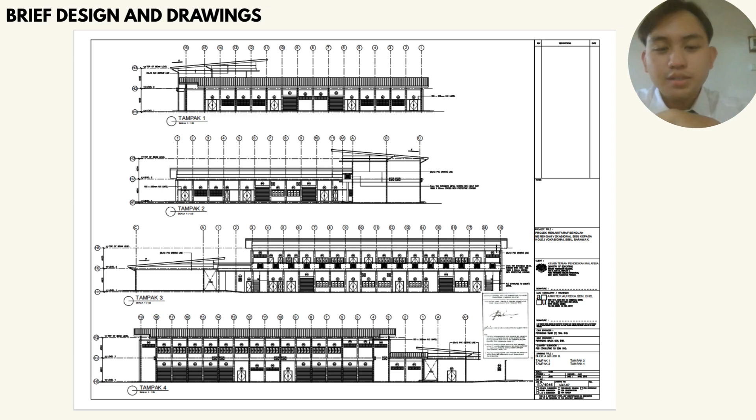Hello everyone, especially to our beloved lecturer Sir Faiz. This is the floor plan for our drawing, which is just a brief design and drawings for the project for College Vocational in Sibu, Sarawak. Thank you.

Hello everyone, ladies and gentlemen, especially Sir Faiz. Now we move on to details of the contract. The Malaysian Ministry of Education proudly announced tender number KP (BP-T) TEN. 14-2020 for the transformation of Sibu Vocational Secondary School into Sibu Vocational College in Sarawak. This landmark project includes major upgrades to Block A, B, and C, extensive external work, and specialized M&E services.

We invited qualified, visionary contractors to seize this opportunity to shape the future of vocational education. Together, let's build a world-class learning environment that empowers generations to come. Thank you.

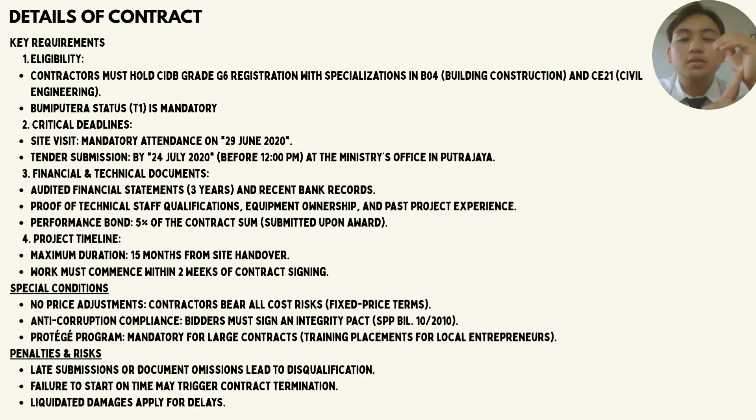The Malaysian Ministry of Education invites CIDB G6 registered Bumiputera (T1) firms with B04 and CE21 specializations to bid for transforming Sibu Vocational Secondary School into a premier vocational college. Tender number KP (BP-T) TEN. 14-2020. The critical dates: mandatory site visit on 29 June 2020, submit bids by 24 July 2020 at 12 p.m. sharp.

Required: 3 years audited financials, technical proofs, and a 5% performance bond. The project must complete in 15 months with strict anti-corruption compliance (integrity pact SPP 10-2010) and protege program participation. Delay risks termination and penalty. This is the chance to build Sarawak's educational future. Thank you.

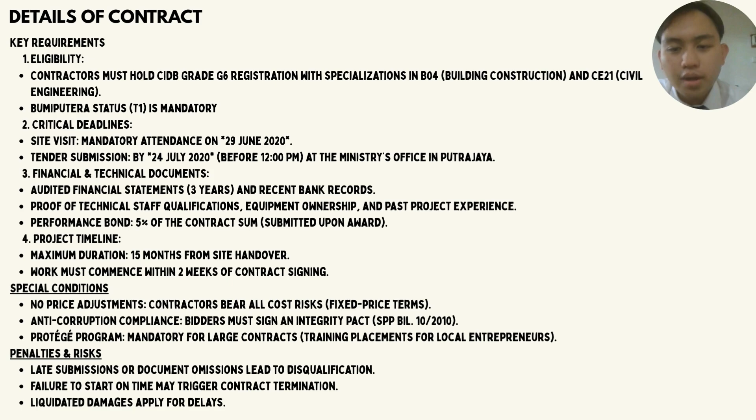Step into this exciting opportunity with the Malaysian Ministry of Education.

The tender process for Sibu Vocational College upgrade begins with eligibility verification and mandatory site visit. After purchasing tender documents, we prepare a comprehensive submission including technical and financial proposals. The two-stage evaluation includes a pre-qualification followed by detailed assessment. Successful bidders will receive award notification, submit a 5% performance bond, and proceed to contract signing.

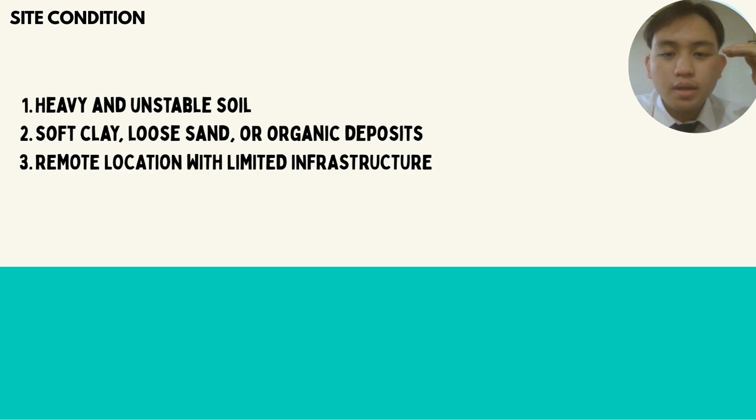I will brief a bit about this site condition. This project upgrade faces significant geotechnical challenges, including unstable soil conditions with soft clay, loose sand, and organic deposits, compounded by its remote location with limited infrastructure access. These demanding site conditions require specialized foundation solutions, careful soil stabilization, and innovative logistic planning to ensure structural integrity and timely project completion. Contractors must demonstrate proven experience in handling similar challenging terrain while meeting the strict 15-month deadline.

This is where engineering expertise meets the determination to transform vocational education in Sarawak.

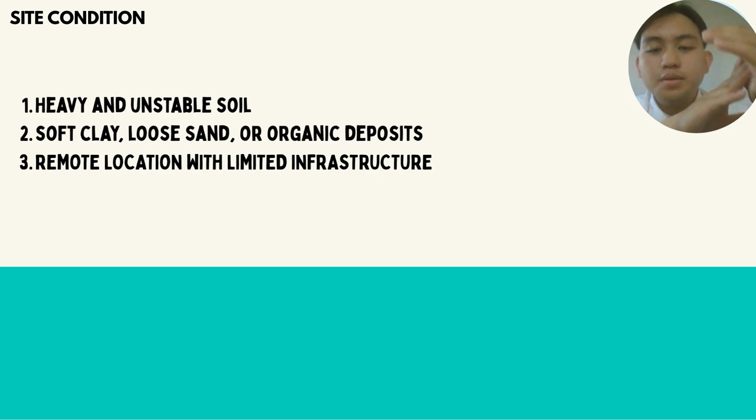The key features: first, problem solution focus, clearly states challenges while implying need for expertise. Second, visual graphics instantly communicate soil or location issues. And the urgency reminder, which reinforces the tight timeline despite difficult conditions. Thank you.

I will brief a bit about this. The Malaysian construction sector is experiencing intense competition across all fronts. Infrastructure projects see massive bidding wars, while property developers battle fiercely for prime projects. The tendering environment grows riskier by the day, compounded by severe labor shortages and skyrocketing material costs.

Adding to the pressure, foreign contractors are entering the market, creating unprecedented competition for local firms. In this high stakes landscape, only the most efficient, innovative, and resilient companies will thrive. That's it, thank you.

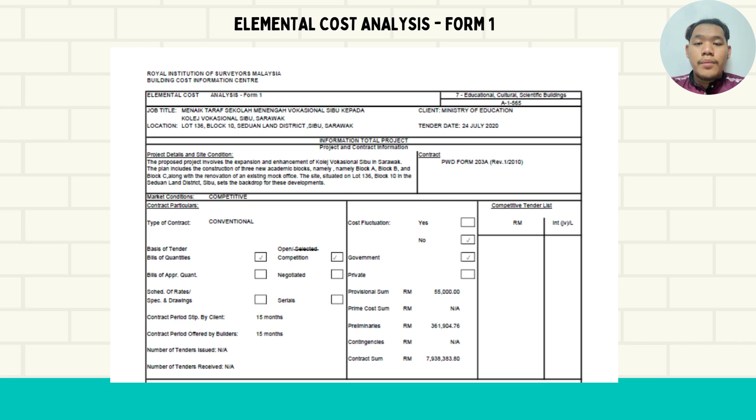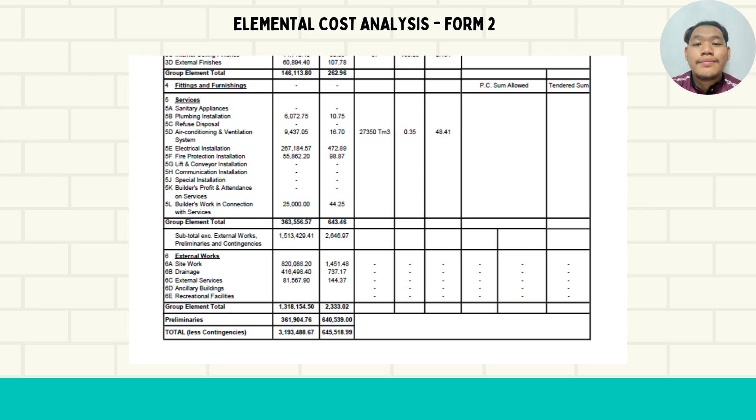A very good day to sir and friends. In this presentation, I will present on my part, which is the cost benchmarking.

For the building works and external works, in a recent case study, a benchmark construction project exhibited a significant negative variance of approximately 76% in main construction costs compared to the calculated mean of comparable projects. Such a large variance, however, does not straightforwardly indicate either superior efficiency or inefficiency. Instead, this project highlights the challenges and limitations inherent in direct cost comparison.

Several factors contribute to this discrepancy, which are the differences. The differences in design complexity can substantially affect the labor cost and material requirements. Material choices and project specification also influence costs, as premium or specialized materials increase the expenses. Also, market conditions, including labor availability and pricing, vary by region and time, further complicating comparison. Additionally, the project location also impacts, including logistics, regulatory compliance, and local economic factors.

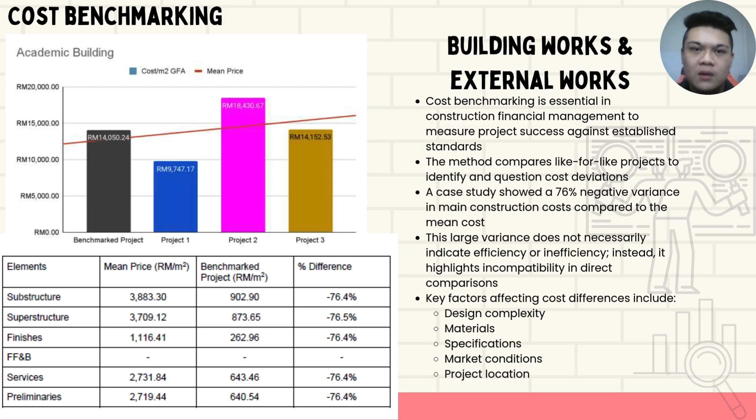Therefore, while cost benchmarking remains a valuable tool, its effectiveness depends on recognizing the contextual differences between projects. Direct cost comparison should be interpreted with caution, considering the topography and environmental variations that affect project costs. This approach ensures that cost benchmarking informs decision making without leading to a misleading conclusion.

Next is the services for the cost benchmarking.

For basic buildings, like warehouses or factories, the range is 15 to 25%. Decent buildings like schools or offices are around 25 to 40%. Lastly, complex buildings like hospitals, data centers, or large government projects are around 40 to 60%.

Given that vocational colleges are typically categorized alongside offices and schools, the expected range for mechanical and electrical (M&E) services would be 25 to 40%. This project's allocation is around 19.4%, which requires a clear examination of the underlying reasons.

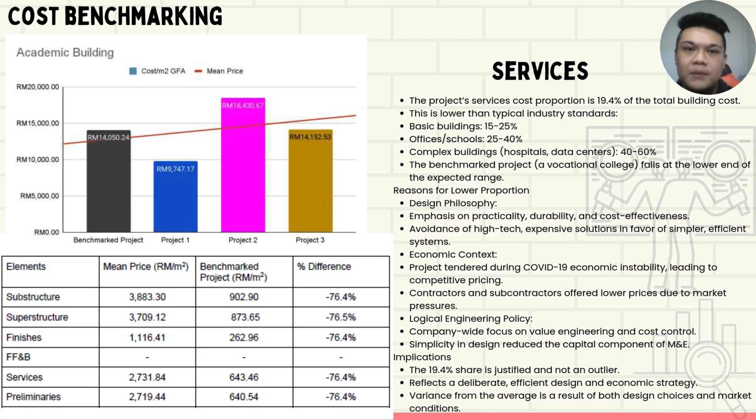Lastly is the implication and contextual justification. Our finding that services accounted for 19.4% of the total building cost should not be interpreted as underinvestment or a sign of poor quality. Instead, it reflects a deliberate, rational design strategy tailored to the project's needs and economic development. The lower proportion is a direct outcome of practical design choices, competitive market conditions, and a company-wide commitment to efficiency.

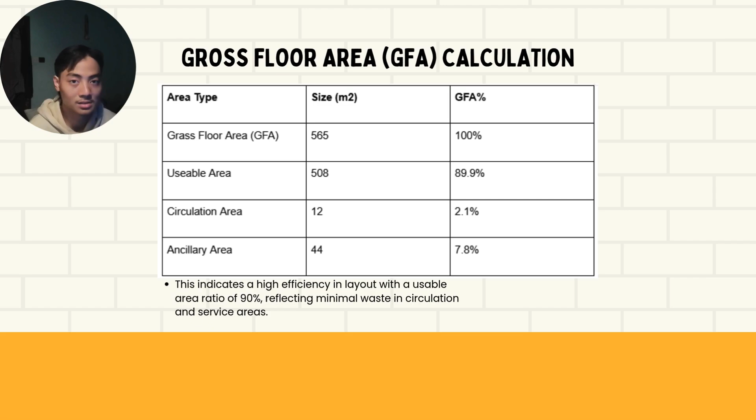The ground floor area is 166.10 square meters, so the total gross floor area is 377.42 square meters. This figure was calculated based on the floor plan layout and used to support both the design and cost estimation stages of this project.

For the general summary of contract sum, the total contract sum for the upgrading of SMV College Vocational is around 7.9 million ringgit. The largest portion, which is 4.3 million ringgit or 54.82%, is for building works, covering construction, finishes, and structure.

External works such as roads and drainage cost around 1.3 million ringgit, which is 16.60%, while mechanical and electrical services together amount to around 1.2 million ringgit, which is 15%.

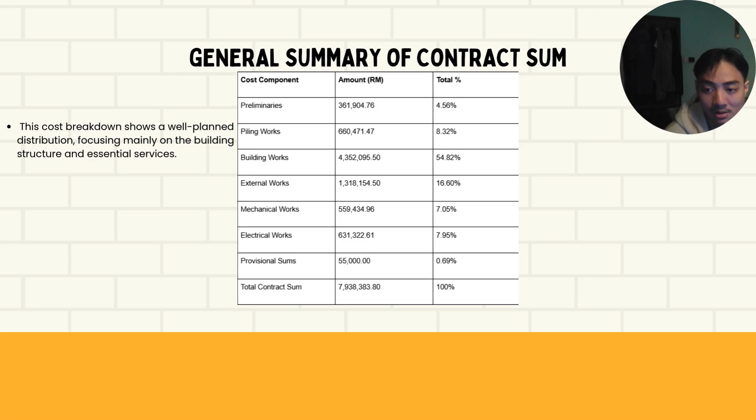Preliminaries are around 360,000 ringgit, which is 4.56%, and piling works cost 660,000 ringgit, which is 8.32%. A provisional sum of 55,000 ringgit, which is 0.69%, is included for uncertain items.

For the conclusion, based on the analysis and supporting documentation presented in this report, the proposed construction of the ECA block is both practical and justified. The inclusion of key spaces such as a surau, prayer room, store, and ablution area demonstrates a thoughtful approach to addressing the spiritual and co-curricular needs of the school community.

The architectural drawings, the gross floor area calculation, and the contract sum breakdown further validate the feasibility of the project, with a GFA of 377.42 square meters and a projected cost of 500,000 ringgit. The proposed development remains within a manageable scale and budget.

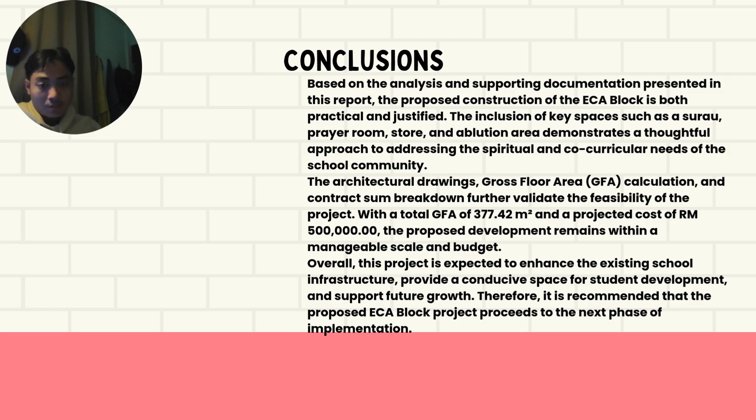Overall, this project is expected to enhance the existing school infrastructure, provide a conducive space for student development, and support future growth. Therefore, it is recommended that the proposed ECA block project proceed to the next phase of implementation.